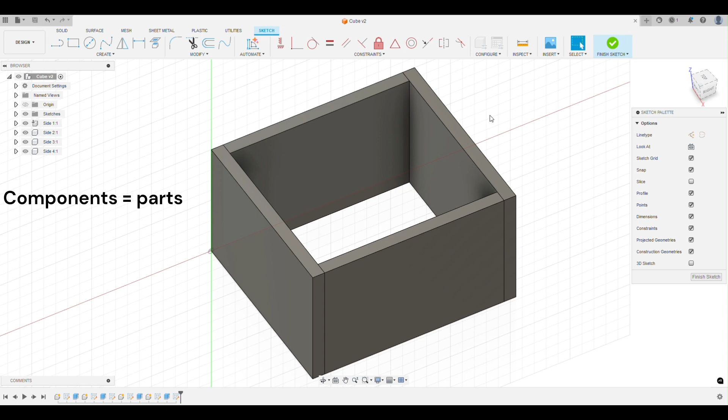So we're going to put some holes into our cube. If you remember last time, we made a cube. It's got 4 separate parts, 4 separate components for each of the walls, so if this went to manufacture, somebody would know that they need to make it out of 4 separate pieces of wood. As a refresher, if you need to turn your grid on, it's at the bottom down here, and this little cube at the top lets you rotate.

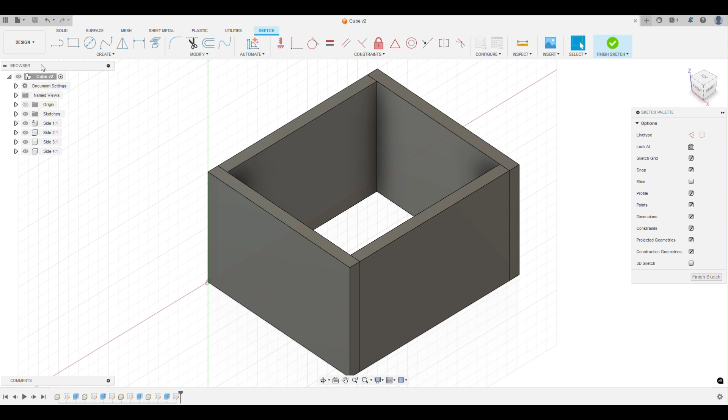So we can see down the side that it's called cube, and you just need to remember that in Fusion you have to keep saving, and where it says cube version 2 at the top, I want to do my sketch on side number 1. I'm going to click on the little circle next to it. It says that this one is active, so it's made all of the others see-through. What I need to do now is make sure that I'm on solid.

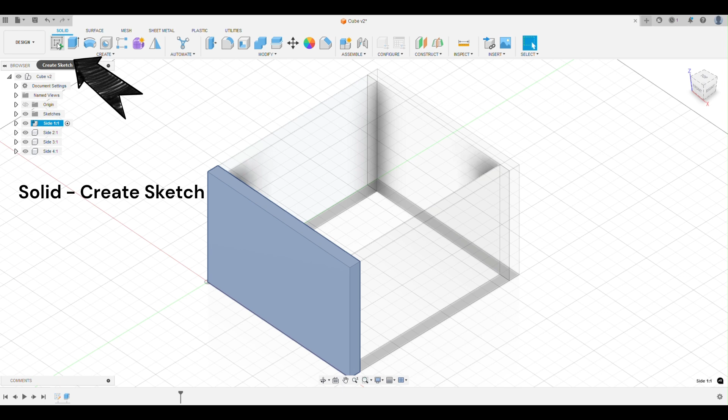I need to press create sketch. Instead of clicking on the planes, I want to click on this side of my sketch. I think I'm going to do a circle this time, so I'm going to click on this. You click to place the centre of your circle, and then click to where you want your circle to end, and it's going to tell me the diameter.

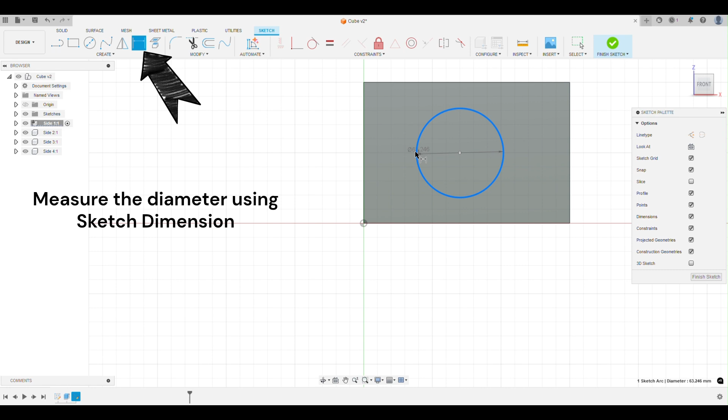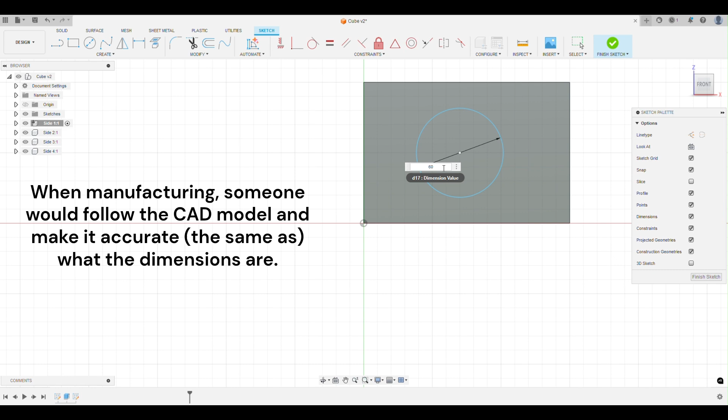So you need to think about the fact that if this cube was then sent off to be made, I'm asking for somebody to cut a hole in there that is 63.2455532034 millimetres, which probably isn't the most sensible dimension for a circle to be. So I'm going to change that to 60. I'm just typing on my keyboard and I'm going to press enter. You can see now that this side of this component here has got a nice 60mm diameter circle.

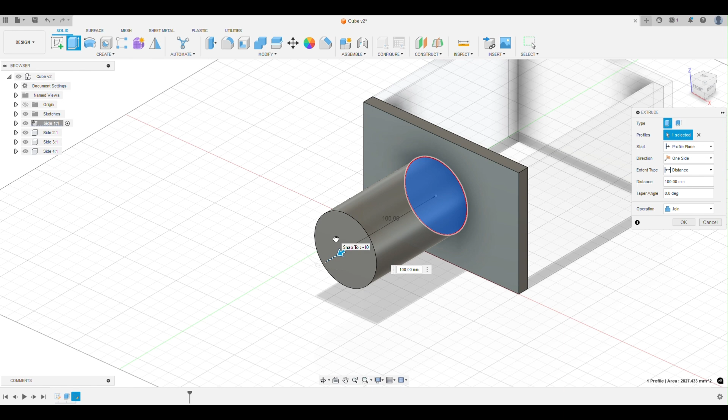I'm going to go to solid, I'm going to go to extrude, I'm going to click on my circle. I've got 2 choices. I can either pull the circle out, which is then going to give me a cube with an oblong sticking out of it, or I can pull the circle back, and you can see that now it's become red - it's cutting out the middle.

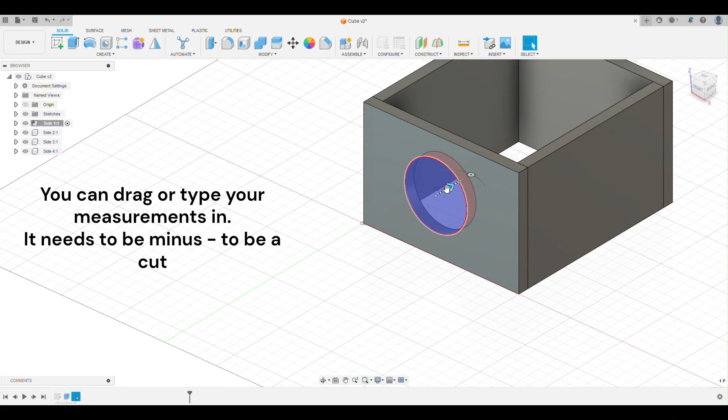So it doesn't necessarily need to be minus 40, because if we remember from the last video, the walls of my cube are 10mm, so minus 10mm is enough to cut out a circle from this side of my cube. If I press enter, you can see now that my cube has a circle missing from it.

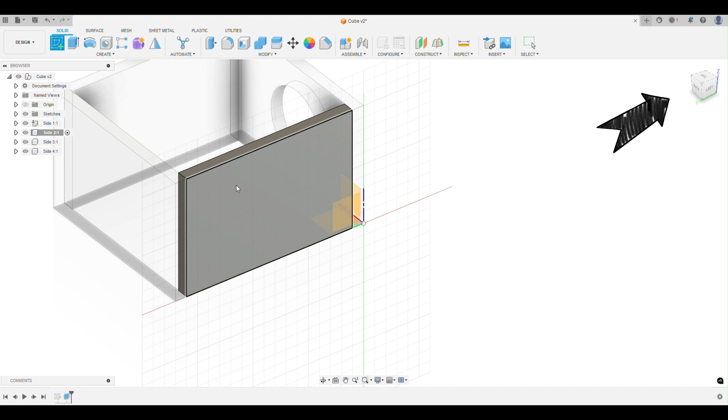Side number 2 is this one over here. I'm going to click on the little circle next to that one, and use my cube in the top corner to rotate. For this wall, I'm again going to go to create sketch. You need to remember to click on the side of the component, not on the grid like we did in the last video. Actually, if you go down to create, you've got lots of different options that you can do.

So if you were looking to put a window or a door in, you might want a rectangle. Or if you were looking to make something like a shape sorter, you could put in lots of different shapes that you could draw yourself. I'm just going to go quite simply this time - I'm just going to go for a rectangle.

So I'm going to put my rectangle in. Again, we need to remember to use the sketch dimension tools to make sure that our segment's sides are sensible lengths, because if it went to manufacture, if somebody went to make it, it would need to be sensible lengths that they could cut out. So this one is closer to 40, so I'm going to round it there.

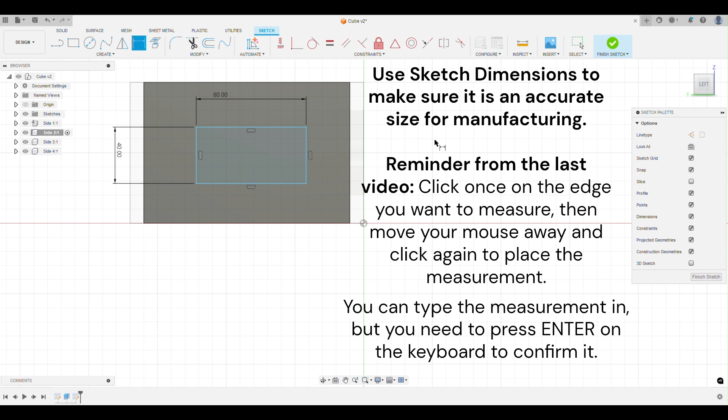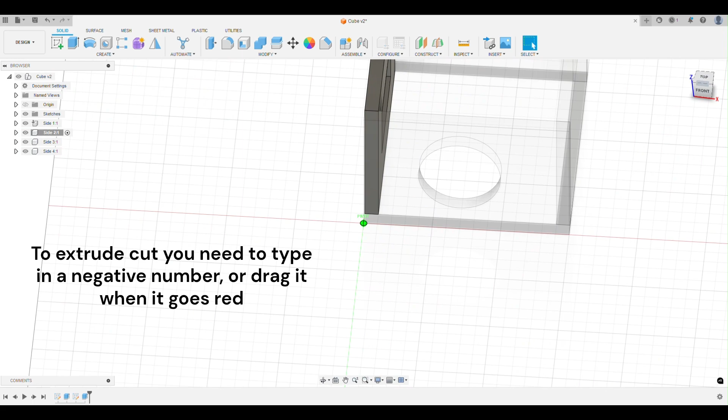If I rotate again, you can see now that that rectangle is on the side of my shape, and I go to solid, extrude - as you can see there, I've got a little rectangle on one side and a little circle on the other.

So you just need to repeat this for all 4 components, and again, try and be creative with the shapes that you do. When you're drawing your sketch, you could have a go at drawing things like stars using the line tool.

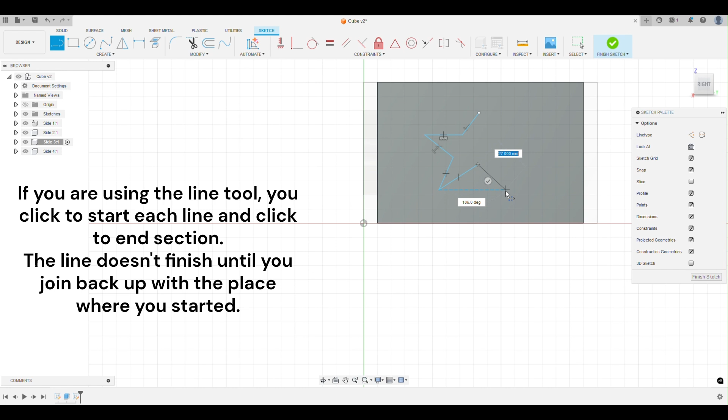So I'm just clicking to start the line, clicking to end the line. You can see there that I have got a little star. Again, you just go back to solid, back to extrude, minus 10, because that's what mine is. Obviously, if yours is thicker or thinner than that, you'd need to change it.

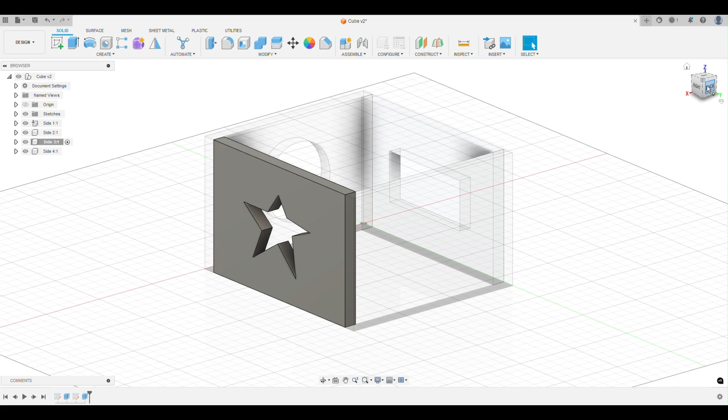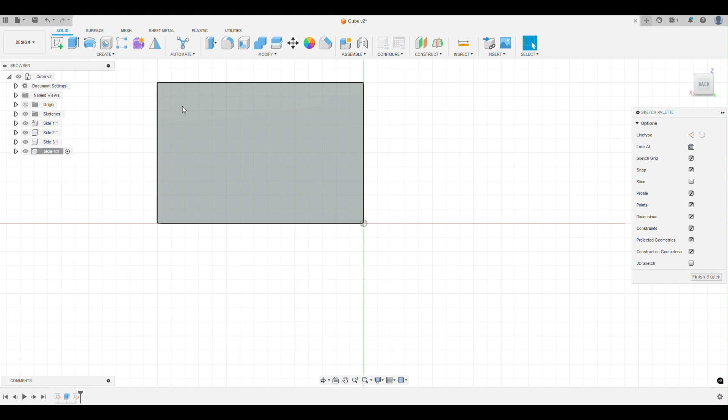And you can see now I have got a star. So just be mindful down the side to make sure you click on the little circle next to your components. When you go on to solid and you click on create sketch, make sure that you click on the side of the component, not on the planes like we were doing originally. Then you've got loads of different choices in here for different shapes that you could be making.

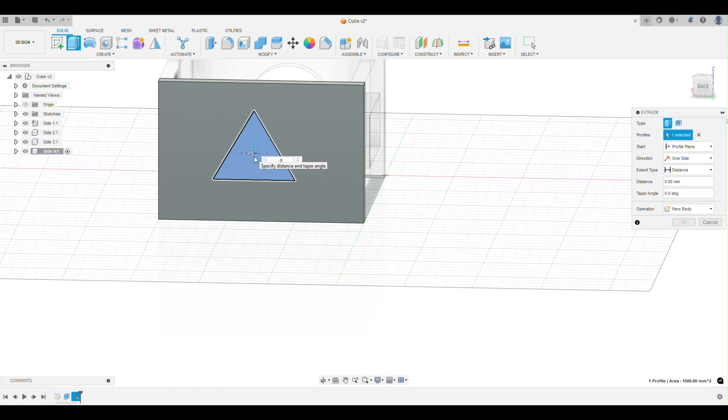So for this last one, I'm going to have a go drawing a rectangle, a triangle even. And I've got my little triangle. Back to solid, back to extrude. Make sure you click on the sketch you've done, so on the shape, and then type in minus whatever your distance is. As you can see now, I have got all 4 components done with the different shapes cut out.

So to make it so that you can see all 4 sides, you just click on the little circle next to where it says cube, and just remember to keep saving, because Fusion doesn't save automatically.